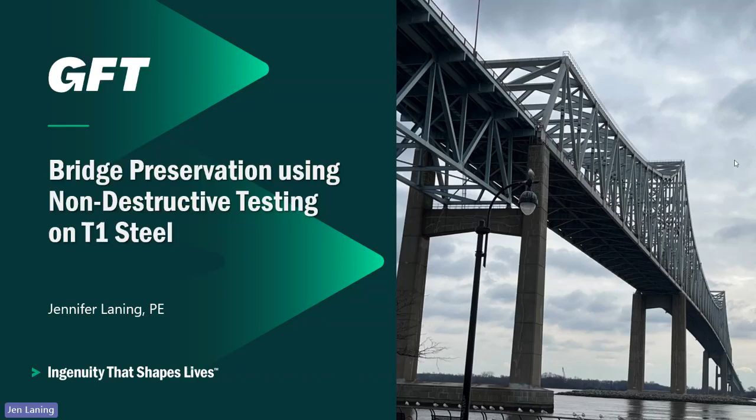This is a presentation that I've also given as part of a TRB panel earlier this year to talk about T1 steel and non-destructive testing. It's a combination of things that created a really interesting project. Technically, it's a little bit outside of bridge inspection per se, but I think it offers a really good look into how inspection is integrated into overall projects, bridge preservation, and response to national emergencies.

Just to start out, here's a few details about the bridge. But before I get into that, I'm not really sure how many people are familiar with T1, or basically grade 100 steel, and the issues related to that. If anyone remembers, during COVID there was the Hernando de Soto Bridge down in Tennessee and Arkansas that had some severe problems, some cracking. Essentially that bridge brought to light a problem that had existed prior to that at the Sherman-Minton Bridge.

Essentially, the use of grade 100 steel has presented a challenge because the era in which it was highly used was also an era when we didn't have D1.5 testing for welds after fabrication as a mandate. So there's a lot of questions about the overall quality of welds in that time frame, which was the 70s, the use of T1 steel, and then also the way T1 steel behaves when it's welded. Because of its use and the construction of bridges of a particular length and size, there's a common weld detail that required butt weld splicing, or basically CJP joints, in members that are under tension. So that's really where we start the story.

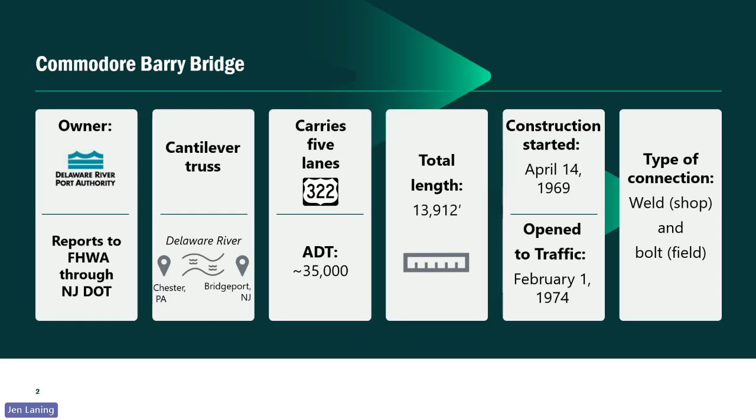And the bridge, it's an interesting structure - I'll show you a graphic in the next couple of slides - but it is probably the biggest bridge in the country that has had this particular situation. So the type of connections were shop welded and field bolted, and the shop welds were what really presented the questions.

So the scope of our project - we pursued and won it in late 2022, and started work in 2023. There were several components: perform a visual inspection of the truss, not replacing the biennial bridge inspection, confirming the number of welds in the tension members. Then we were going to perform weld testing because they didn't really have a solid understanding of how many welds there are. When you look at the shop drawings for this bridge, that's not a failing on the part of the owner or the inspectors - things are just not always built the way the drawings say. So that was why we had to confirm the numbers and not make any assumptions.

We did weld testing on the T1 welds, and the owner of the bridge also asked us to do some additional testing on other welds on the bridge that they had been monitoring over time, on some members with different strength concerns. So we worked with a couple of other firms to do that as part of our project, and then prepared a preliminary design recommendations report. This did morph into a construction project, as I'll explain.

At the time we were doing quarterly reporting, and working with the ongoing biennial inspection consultant, giving them our rating on the bridge, our condition rating. Going back to my personal experience, this is a kind of synergy between design, rehabilitation, inspection, and evaluation. My particular experience really lends itself to the inspection and the logistics associated with that for a bridge of this size.

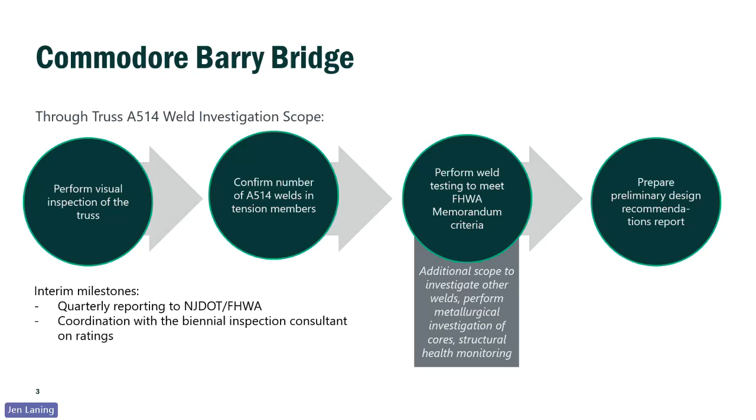But I'd have to say, just as a personal note - take this for what it is - 33 years in, I'm still learning. I learned a lot on this project and had the opportunity to really grow my experience and try new things and stretch. Never think that things are boring - there's always something new to learn for sure.

So we had a team that was pretty big, but I think the top two firms that lent us the most credibility to our project team were Wiss, Janney and the folks there, and Frank Russo of Frank Russo Structural Services. Probably a lot of you folks have either been taught by Frank or know him personally. I'm very fortunate to be a friend of his and learned a lot from him. The reason we wanted these folks on our team is, as you can see, they've worked on a ton of bridges with very similar issues. Frank in specific was a key player on the Hernando de Soto.

He was also involved in Sherman Minton, and so was WJE. Their folks, Travis Green, Curtis Schroeder, and Bob Gessel, really were instrumental in starting to recognize the issues around the particular chemical composition of the welded member, and what was the problem with T1 steel - essentially hydrogen cracking or hydrogen indications resulting from how the welds were worked in grade 100 steel and that chemical composition.

We don't have 27 hours to talk about that, so I'll leave it there and invite you to look it up for more information. But I learned a lot about welding that I did not know, and this is really why this team was key to the success on this project.

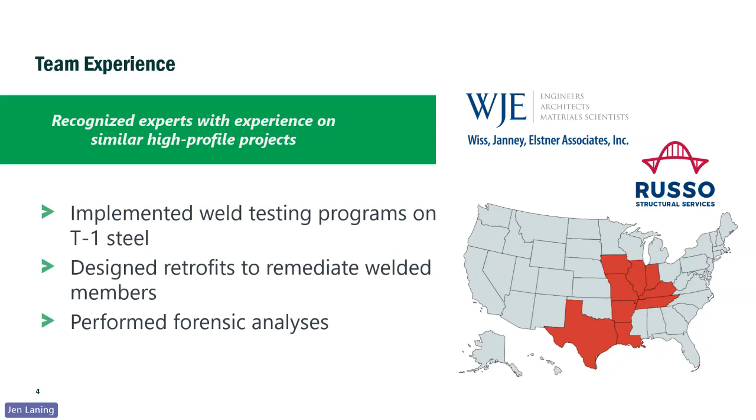Just for a point of fact here, you can see at the bottom of this slide, here's the Hernando de Soto - 1,800 linear feet, about 190 feet high. And then you look at the Commodore Barry, the main truss is 3,200 feet long, so pretty much double, and was 240 - 50 feet taller than the Hernando de Soto.

Doesn't diminish the role of Hernando de Soto in our collective bridge history. I think anybody who does inspection, we kind of get that story of how bridge inspection came about, how it's grown over time, morphed and changed. I always tell people every time something falls down or there's damage to something, it changes what we do and how we do our job in bridge inspection.

And this is very similar. Commodore Barry has a role in it, but Hernando de Soto really was the catalyst to creating this memorandum that resulted in us having to do the work.

Again, Commodore Barry is probably the biggest bridge in the country that has had this issue, and you can see just the height alone really lends itself to a lot of my conversation about access. Because if I could draw a parallel line to the deck across that structure, you would see - I don't know if you can see my mouse, but we had about a 180-foot line that was a dashed line on our plan.

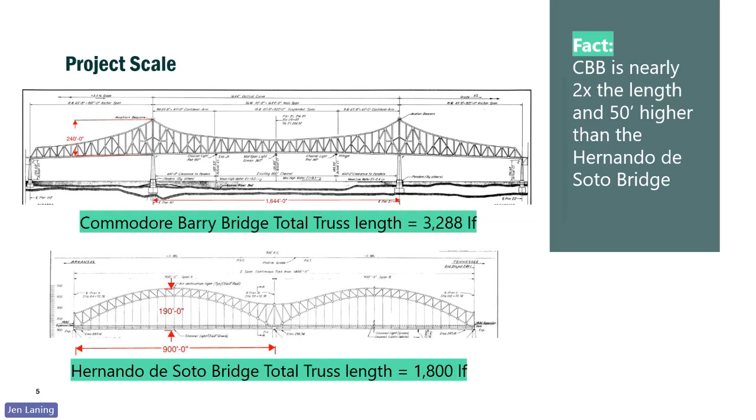So we had to do a lot with NDT methods. Again, we did a lot of research, a lot of conversation with folks at WJE, to discuss what's the best thing to do, what about removal of paint - all these arguments that are ongoing and still continue. But what we landed on at the end of the day was eddy current testing.

I go back to the map where we show all the places - at the time we were TranSystems, we're GFT now - but TranSystems was also currently working on a project in Texas doing this work as well. So with our combined experience, down there they used a different type of testing to check for the weld - they used phased array. So there was a whole conversation around what was the most cost effective, what was most implementable in the conditions we were going to be working. We landed on shear wave, realizing that phased array wasn't really going to get us that much more information than what we had. We used eddy current to locate the welds, and I have some pictures with that.

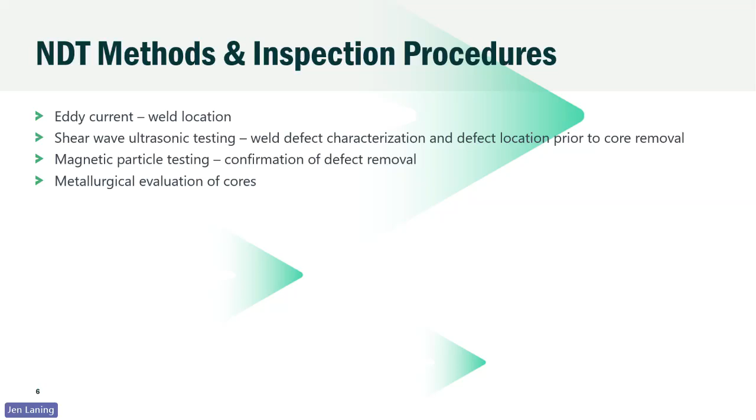As we were putting this project together, we had critical path items, and those primarily were the number and availability of inspectors. I've done this job for a long time, and we all know there are certain specialties that are hard to get out in the field. One of those is NDT people, and having them on site.

We utilize several firms to provide us with NDT people, but one of the things DRPA did a great job at was putting in the scope of work that they wanted an established certification or qualification program in place, to make sure inspectors knew what they were doing and could find these particular indications, because the indications typical of the problems we were having were extremely small and very hard to find.

As noted through Sherman Minton and then Hernando de Soto, we didn't want to just have people out there who might be very good testers but didn't know exactly how to find what we were talking about, and then say sure, everything's great, move on to the next member.

So we had essentially a qualifications period where we sent testers to Wiss Janney's lab in Northbrook, Illinois, and they basically tested them. Curtis Schroeder, who really pioneered the process, tested them on actual members from those bridges to see if they could find it, talked about calibration, and set the stage.

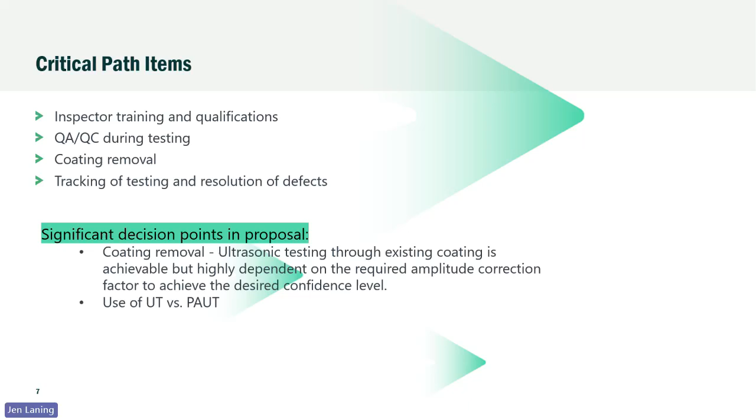The level of detail needed to track over 1,000 welds, and what was going on with them at any given point with all the moving parts, has been really important to have a good system in place. So again, the significant decision points were coatings and the use of UT versus PAUT, and we went with UT.

So our weld inspection project had a lot of challenges. We performed testing from August 2023 through March of 2024. We had lane closure schedules and had to coordinate with operations.

They might want to do some deck repairs, some inspections, or repairs to the lighting in the gantries, or the bridge inspection team might need to be out there - that was from HNTB, and from AECOM at the time - it all overlapped.

And I'm really proud to say I think we managed that well. We got to know the guys at Bridge Ops and worked closely with them. They would also lay down the traffic control for us, so you had to be aware of when they wanted to pull in the extra lane, the bump out, when they couldn't, and what holidays were coming.

Weather was an issue too. We went from August 2023 through the winter of '23 to '24, and I'm telling you, that was a nightmare. It happened to be probably one of the worst winters we'd had in a long time in terms of wind and snow.

And just because it snows that day doesn't mean that's the only day you lose, because you have to come off the bridge maybe the day before so they can salt and get the bridge ready - we could leave our closure up and our equipment on the bridge, but man lifts are not fast moving vehicles. Coming back on the bridge might take 2 or 3 days, so we'd lose a significant amount of time. The cold temperature also slows equipment down, so that's another factor.

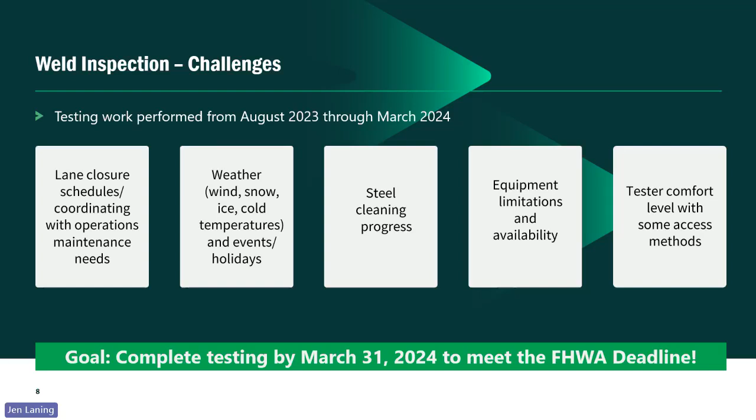But we did complete testing by March 31st, 2024, and we met the federal highway deadline for the evaluation of the welds. Going back to our plan, started in June 2023, we did a visual inspection of the whole bridge on the tension members where these welds were.

Primarily just to make sure there weren't any cracks or any surface breaking indications in the vicinity of the welds. But then we also marked out the welds for the contractor.

We did some imagery with UAS just to get an overall look at the bridge as well. And then we wanted to get a familiarity with the structure so that when we were ready to get the testing and coring, we could work with the contractor on that.

So then, also during the visual inspection, we were utilizing snoopers for the bottom chords, and we had rope access teams out there to do the upper level, again to do eddy current, because the welds are located on all faces of the boxes.

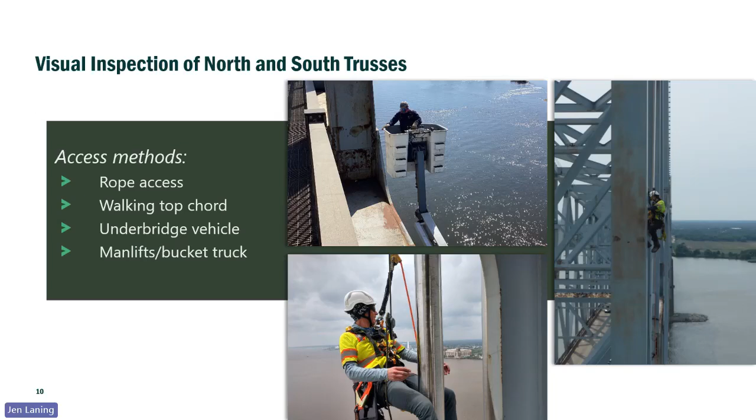If you could see from this picture, he really couldn't go down the side. Those boxes are super deep, and it's a safety issue. So we really had to utilize man lifts or rope access to do the vertical and underside faces and locate the welds there, because sometimes they weren't all lined up in the same place.

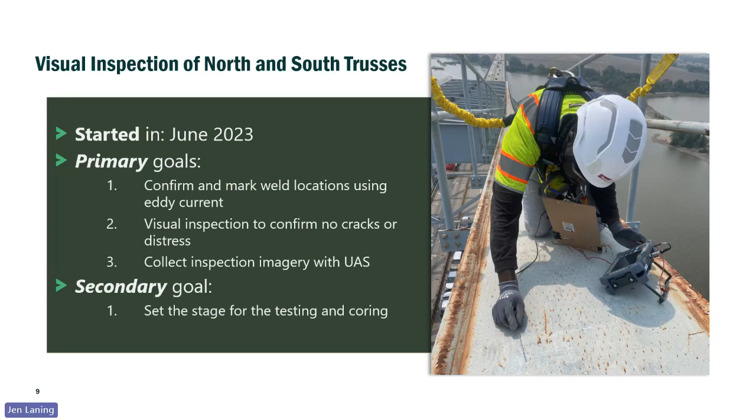You can see here that there's no external indication, at least on the chords, on some of the top and bottom chords. The transition from a thicker plate to a thinner plate, which is where that CJP weld typically happens for this type of structure, is inside. So you can't see anything that lets you know there's a weld there. It looks perfectly flat because the change in thickness is on the inside. You'll see in some of our other pictures that on the verticals and some of the diagonals, the transition is on the outside, so you get an idea where you're at. But for these, this is why we had to use the eddy current.

So we used a bridge elevation and tracking. Here's an elevation from our weld tracking program. Essentially, this is Janney's proprietary product, called Plannotate. Everybody who was on the bridge had an iPad, and this was loaded into the iPad. So all the testers had an iPad with their partner. We provided a team leader for all of them throughout the whole project. And every single weld is located on here.

HNTB had put this together from something they had, and we were grateful for the sharing of information through the client. Essentially, we located every single weld and indicated where it was. There were some that were marked as there but weren't, because of construction changes and things on the as-built drawings. As you can imagine, these drawings are pretty old. So we had additional welds in other places.

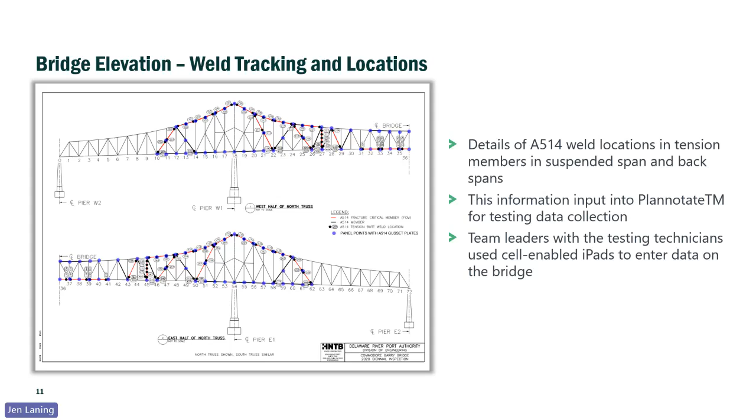There were A36 and A588 added into the project as well, which came up to over 1,000 welds. This was loaded in, and then we had the screen where you can see the list of all the welds at each place—top, bottom, inboard, and outboard.

Sometimes there was just inboard and outboard, or sometimes just top and bottom. On the side, we could click out to a Google form where it did the calculation for us as to whether it was an indication that was rejectable or recordable. We put in information, and you can see the status there too.

There were little dots, either green, red, or yellow. Was the paint removed here? Was the test done? Does it need someone to go back? Was a QA done? Do we need to do something with it? Is it rejectable? That really ruled our life.

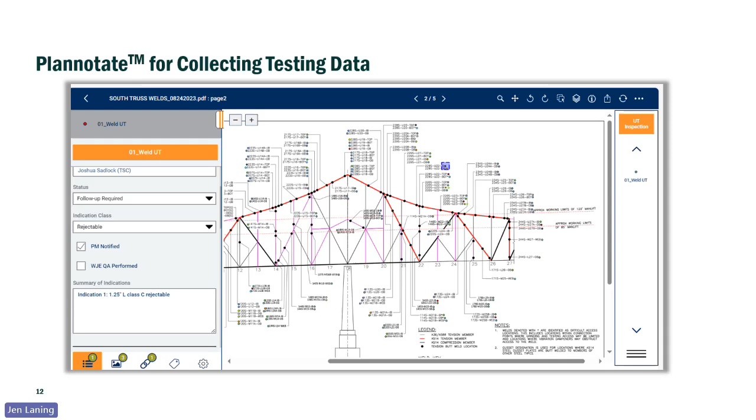These little dots, we could print that out, and we had pictures associated with it everywhere. So I give 100% credit to Plannotate for keeping this job on track, because I can't imagine—we probably would have had spreadsheets everywhere.

Here's a little bit about our inspector screening qualifications. We did this testing in July and August, and then a couple extra ones as we added some people later on in the process. I was really glad we did this.

We sent a total of 10 people up there over the course of it. Only one person didn't pass, everybody else passed. It really gave us this incredible depth of teamwork to be able to shift people in and out.

That was one of the things I kind of knew going in—I didn't want, three months into this project, so-and-so getting moved to another job, or him going on vacation, to be a problem. We had people to back other people up. So it worked out really great.

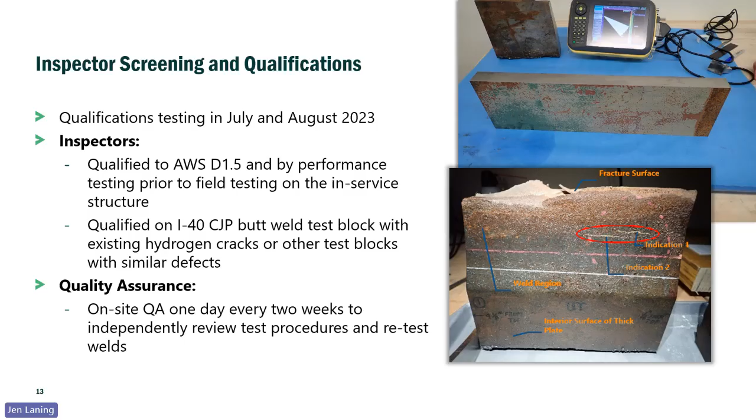A little bit about the quality assurance—you can see here the kind of things they were testing themselves on, conversations about calibration and all of those things. They spent about 2 days at the lab, so that was built into the project.

The different access methods varied—maintenance walkways, walking top chord, underbridge vehicle, bucket truck and man lifts, spider baskets, and rope access, all to get up there. We even had to find a tester who was rope access certified in order to get that work done on the structure.

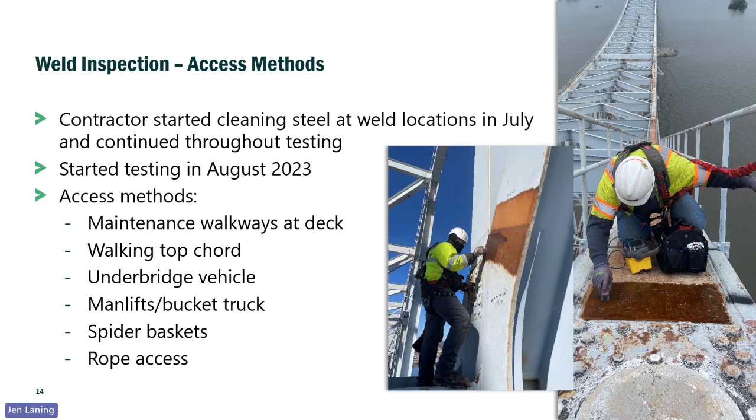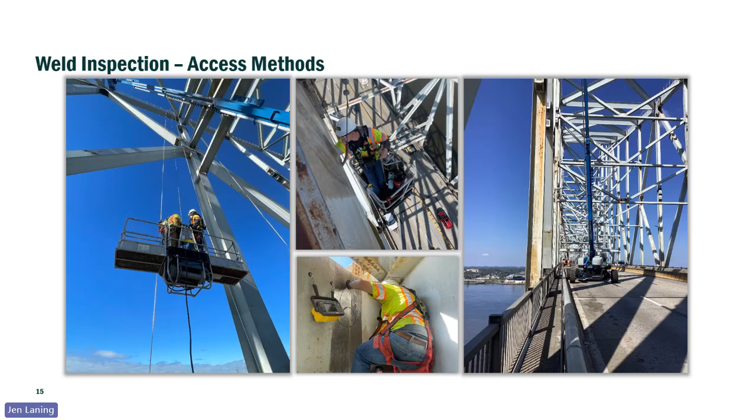And then you can see down here, the tester in the bottom picture is working underneath the deck, standing on a gusset plate where he's tied off.

So the original contract scope required taking 10 core samples, utilizing those to do some metallurgical analysis, trying to determine the nature of the indications that we were finding, and whether there's a propensity for hydrogen type cracking on this bridge. We had 5 by the end of 2023.

Some of them were actually remediating core testing that had been done earlier, in 2012 through 2022. The DRPA was including testing of some percentages of these welds as part of the biennial inspections, and that was then derailed with the whole 'must do this now' mandate from Federal Highways. So they were in a process of testing as they went until that mandate came out.

So we went and took 5 of the cores right away. Then in February 2024, kind of simultaneous with finishing up the testing, we started coring locations that we knew really contained single rejectable indications, because that was really what the resolution was going to be anyway, to remediate the bridge.

Federal Highways wanted these addressed. They considered them critical findings. So New Jersey's like, that's an emergency and you need to get rid of them. You can't just walk away from the bridge and go this location, that location. So we started down the path of remediating within the first phase of the contract.

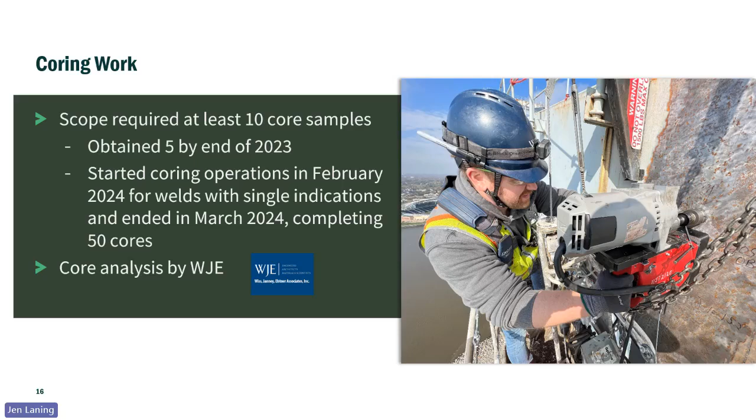We had all of them, and Federal Highways recently picked them up, and they're going to keep them, and some of the other ones, the 3 inch ones, and some of the other ones from other projects across the country, to do some kind of research or maintain them for future research. So we're glad to have contributed to that as well.

So at the end of the day, the status was that there were previously 143 welds under the biennial testing program. We retested 12 of those because we were unsure of the consensus on those. And then we did 594 welds that were the A514 steel and grade 100 steel.

And then we did have 18 inaccessible welds. Those are welds that are really sitting at a confluence of multiple weld locations up top, probably a 5-member connection point in a few places. The weld testing there would be inconclusive due to the overlap situation. So they're just going to have to be visually inspected on a regular basis.

But that's the results of what we had going on. And the reason why they're uneven is because some of the welds in that 143 were tested more on one truss versus the other truss.

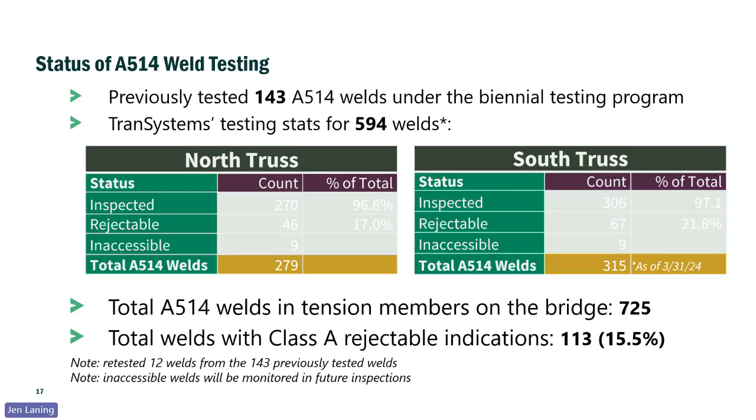So our testing conclusion is that many indications were found that wouldn't pass today's D1.5 inspection standards. Not all were crack-like indications. Most of them, as a result of our coring, really were junk in the weld, just unclean, didn't scrub, stuff from the stick, not a main problem, right? Just kind of like welding at the time in the 70s when that was done.

We indicate that probably similar rejectable indications exist in many of the non-T1 welds throughout the structure, because those don't have a recorded history of these kinds of failures and problems that were typical of Hernando de Soto and Sherman Minton bridges. Then we're just going to live with it and go forward until that's different. So it just is what it is.

Plan of critical action we had to do to get the remediation to be complete by September 2025. We are mostly on track with that.

They've started another painting and repair job that's going to finish up the last couple of locations this month.

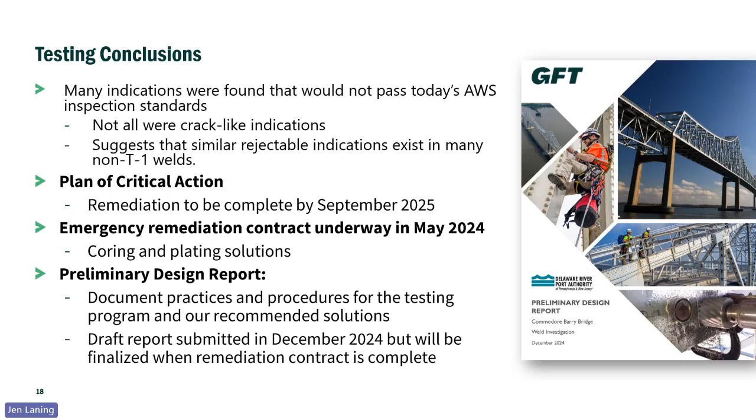We started an emergency remediation contract to address the additional cores we didn't get, or the ones that were bigger than expected. That led us into coring and plating solutions. We also had a preliminary design report, did a draft, and turned it in December 2024 on time. We got comments back but paused it because we were so deep into the repair project. I think we're going to wait until the repairs are done and then create a scope of the whole project, so we're not only reporting on part of it and leaving things undone. We're just going to give them everything we did and put a period at the end of the sentence.

The emergency remediation contract consisted of coring, which went to the contractor that was working with us, although they separated out to now work independently as a contractor, primarily because a lot of consultants aren't insured to do construction work of this nature. We, though, stayed in place as the resident engineer and construction manager.

We had coring locations of 1.5 and 3-inch cores at 54 locations. We did intermediate repairs, which are kind of like a little Franken-repair—they might have multiple cores, looking like a snowman. Some people call them a dog bone or a slot. Some were located at the corner of a box, so we had to be a little creative with how we remediated those.

Is there a detail for those? No, it was on the fly. We came up with a solution.

We had about 42 total plating repairs that were preliminarily designed, kind of like, this is the connection, this is what a plating repair would look like. But each one was designed individually in the shop drawing phase, like field verification shop drawing, because the configuration of that connection might be a little different, with existing bolts and that kind of thing.

We did a structural analysis to evaluate the member capacity with a reduced section. That also determined whether something became a plate or stayed a core. There were some welds that rang the bell for half the weld or the whole weld, and those went immediately into the plate pile—we didn't really play around with that too much.

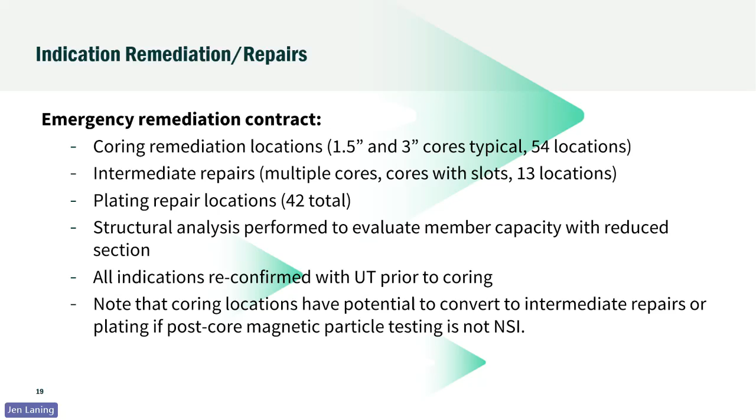On the fly, making decisions—I think that's part of bridge engineering in a lot of ways. Not everything is always cut and dried and beautiful. You have to just go with the flow and figure it out.

We had to again maintain the access and put in long-term wide load restrictions. We had challenges to get people at height for extended periods, because now it wasn't just go up, test, come down—you had to stay up there, put in plates, and work within box members.

We had weather issues. As you can see here, this is what they call the shark cage—essentially an enclosed repair around the plating location. We also had to provide a horizontal safety line across the top chord to tie off the workers, because you have multiple people up there now working for extended periods of time.

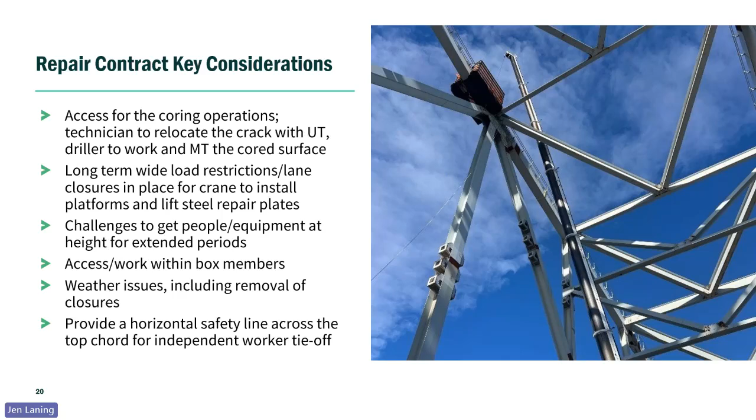So we had to do crane pick plans and that kind of thing. You can see here some of the inside of these boxes that protect both the worker and the traveling public—we didn't want to drop tools or drop a bolt. It let folks work up there relatively safely, relatively because it's probably not fun on a given day, but protected from the weather. Everyone was safe 100%, but the weather was a real challenge in these locations.

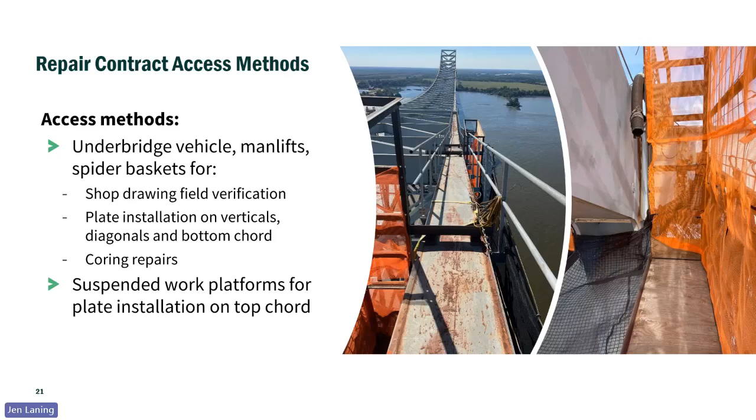So we had these work platforms up there. You can see here, we still went back to the coring—you see the notes for the weld number, name, and picture.

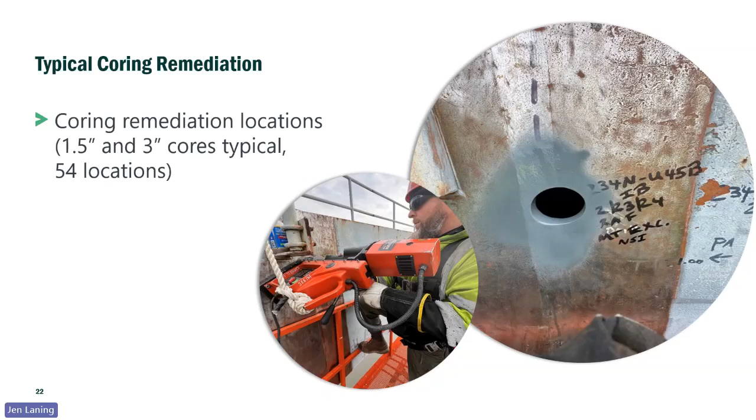And then I don't think I have a picture of, maybe I do. We used plumber's plugs for the cores to put them in there and prevent weather from getting in there, moisture and animals, birds and such.

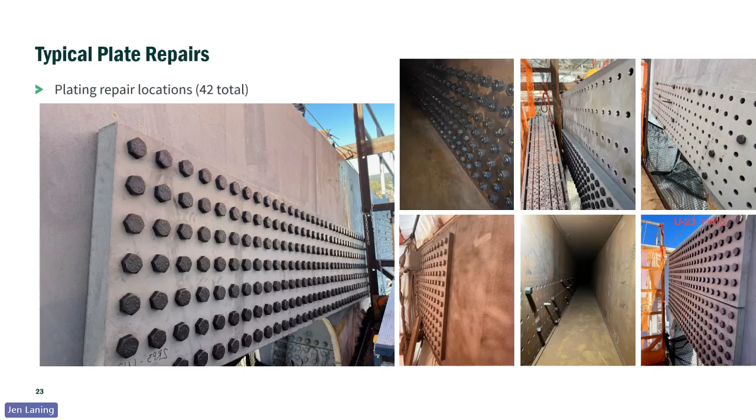So we did that. Here's some of the pictures of the plating work. You can see drift pins in the middle picture on the bottom. Some holes are pre-drilled, and then they come up and field drill the remainder holes to get the plates on. In places where there are existing bolts, you have what's called a cheese plate in place. It really was a creative amount of effort. T.Y. Lin did a fantastic job reviewing shop drawings and advising the contractor and approving the work plans.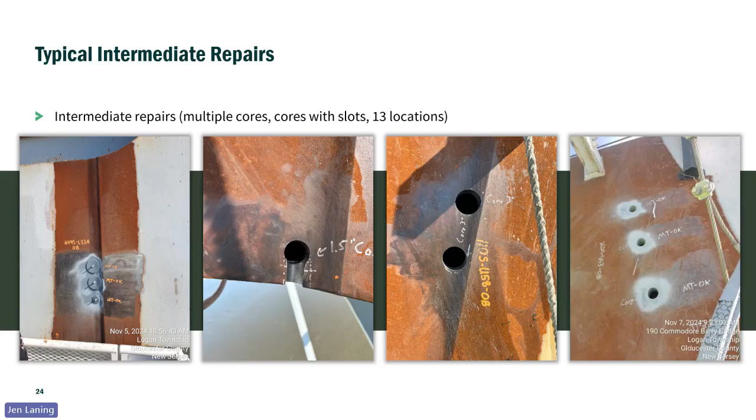So at the end of the day, I've talked a little bit through the whole talk about lessons learned, but I think the big points to take away from here, bridge engineering is a very dynamic, living problem. If we ever have to be in this situation again, the takeaway is inspector qualifications are super important. If you don't have good information coming in, you don't get good information coming out.

Our QA for NDT, we had thought about that at length and really made the point in our presentation to win the work that we knew we'd need to do that. Really take account of things that affect production rate.

I learned a lot on what I would do a little differently if I had to do it again. And then the testing and management tracking application, investing in that and bringing that to the table, I think was also one of the decision points for the bridge owner to choose us, because we had put thought and effort into it ahead of time - we weren't just going to be using paper and spreadsheets. We were being innovative and going from there.